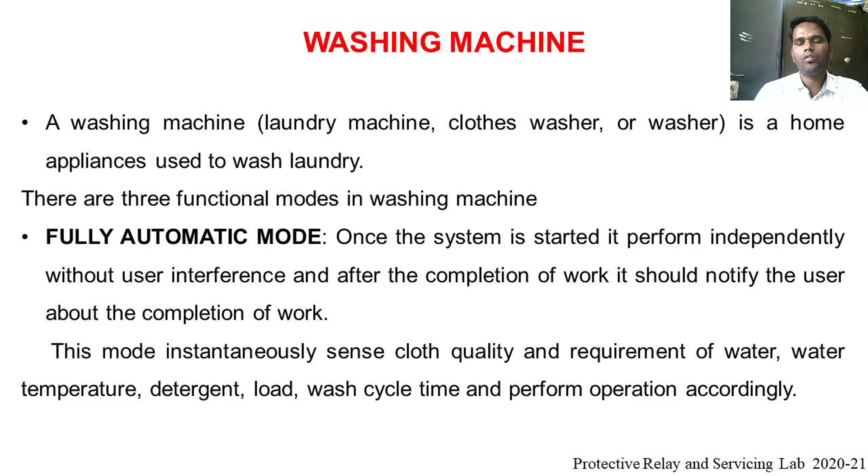This mode instantaneously senses the cloth quality and the requirement of water—water temperature, detergent, load, wash cycle, time—and performs the operation accordingly. It automatically senses how much cloth is inserted, the amount of water required, the water temperature, the amount of detergent needed, the load condition and type, and the wash cycle—pre-wash, wash, rinse and spin—along with the time for each cycle. All these are done automatically by the fully automatic mode.

Next is semi-automatic mode. In this mode, washing conditions are predefined—what is the time for pre-wash, wash, rinse, and spinning. These conditions are predefined; we have to set them in advance. Once the predefined mode is started, the system performs its job, and after completion it informs the user about the completion of work.

Next is manual mode. Here the user has to specify which operation he wants to do and provide related information to the control system—inserting the clothes, adding water, adding detergent, setting the washing time and the spinning time. Everything has to be manually set by the user, which is why it's called manual mode operation.

Next is the semi-automatic washing machine, which is the subject of this experiment. In this semi-automatic mode, the washing conditions are already predefined. Once the predefined mode is started, the system performs its job, and after completion it informs the user about the completion of work.

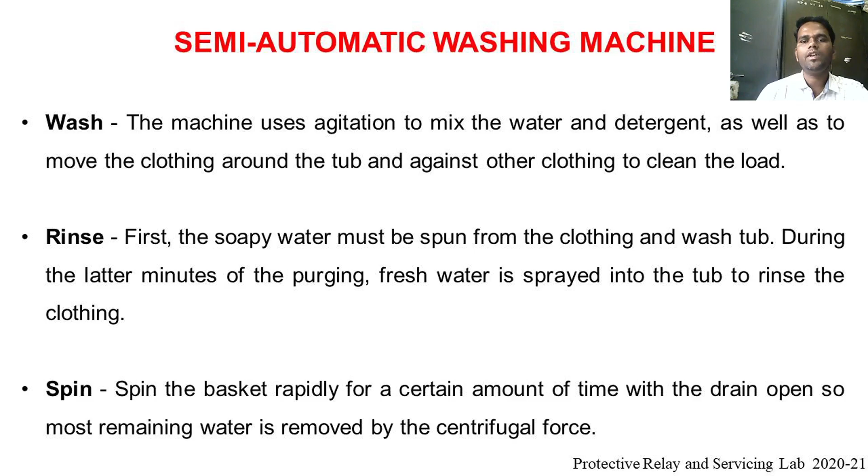Similarly we have the outlet valves. From the outlet valve or drain valve I take the soapy water from the tub. There are two tubs here: one is the inner tub, one is the outer tub. The inner tub houses the agitator. I add the water, add the detergent and place my clothes inside the inner tub, and I have an agitator in the inner tub. The outer tub is the one which holds your inner tub. One more thing is that this agitator is connected to the motors, which are coupled with a conveyor belt and gaskets. One more part is the water pump, which takes the water to the inlet valves.

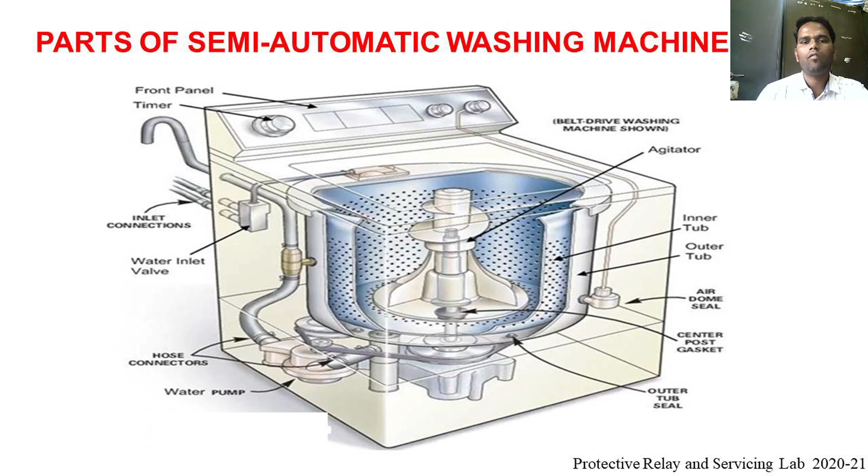So what are the parts of semi-automatic washing machines? The water pump circulates the water through the machine, rotating in two directions, clockwise and anti-clockwise, to remove the dirt from the clothes. That is achieved by the water pump. Next is the water inlet control valve. This is located near the water inlet point to fill the water in the tub. To fill the water in the tub we need a water inlet control valve.

Next is the drum, a very important part. There are two drums inside the washing machine. One is the inner drum, where the clothes are loaded and water and detergent are added, which moves around the washing machine and is perforated with holes to allow the water in and out. And the outer drum houses the inner drum and the water, stopping it from leaking into the rest of the machine, and supports the inner drum. It does not let the water go to different parts of the washing machine. Otherwise, if the water leaks, the associated parts like the motor will get damaged.

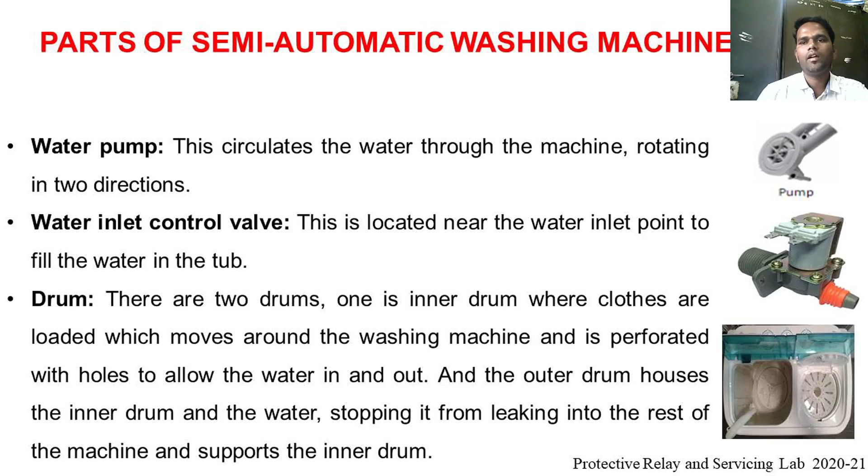So next is the agitator or paddle, a very important part of the washing machine, which is the main part which washes our clothes. It is located inside the tub of the washing machine and helps perform the cleaning of the clothes.

So next is the washing machine motor. This is combined with the agitator or the disc that turns the drum. So a very important part is the washing machine motor, which is going to rotate your washing machine drum. It produces a rotator motion.

The motors used for automatic washing machines earlier were universal motors, and nowadays we use modern electronically controlled single phase AC induction motors for the motoring action.

So the last one is the drain pipe. All the dirty water from your washing is expelled from the machine via the drain pipe. And the next one is the display and control unit. It houses all the control buttons to perform all the washing cycles. From the control display buttons, I am going to perform all the actions by pressing the buttons or regulating the knobs.

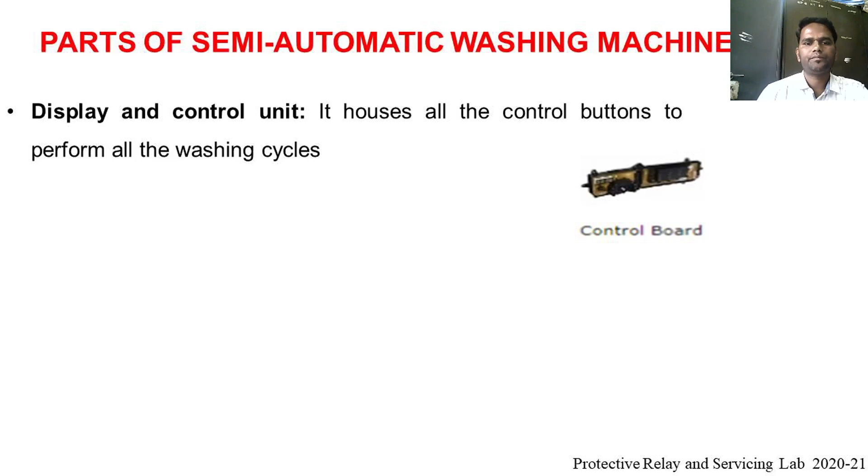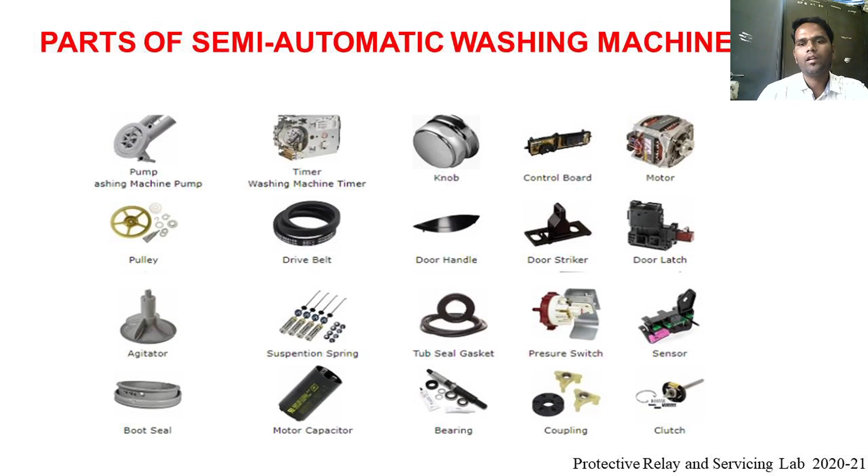And bearings. Wherever there are mechanical rotating parts, we need proper bearings, and couplings are used for coupling my motor with my agitator, and clutches. These are all the different parts of my semi-automatic washing machine.

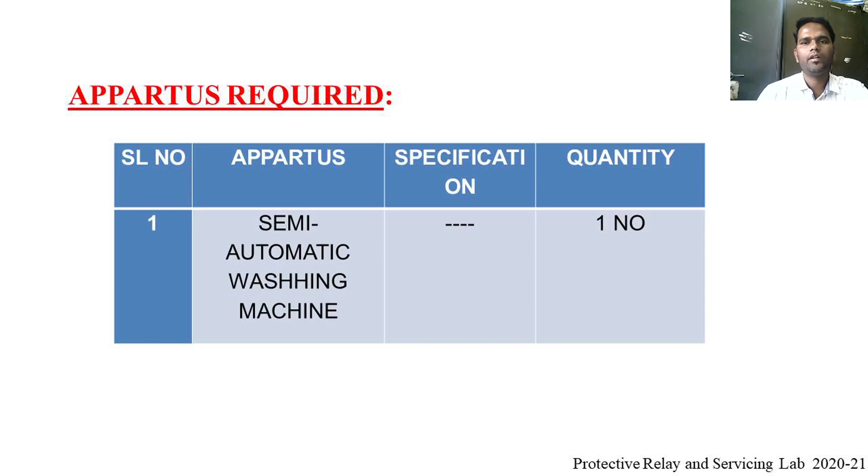So the apparatus required for this experiment is the semi-automatic washing machine. The tools required are a testing lamp, continuity tester, cutting plier, and screwdriver.

So this is the circuit diagram for the semi-automatic washing machine. The input supply comes from the mains, and it goes to two switches, which control the two motors. So I have two motors over here. One is the washing motor, one is the spinning or dryer motor. Both motors are universal motors or single phase induction motors.

For both the motors I am using capacitors. Capacitors are used to give the starting torque to the motor. Once the torque has been generated, the motor will start rotating. Once the motor starts rotating, the capacitor is disconnected.

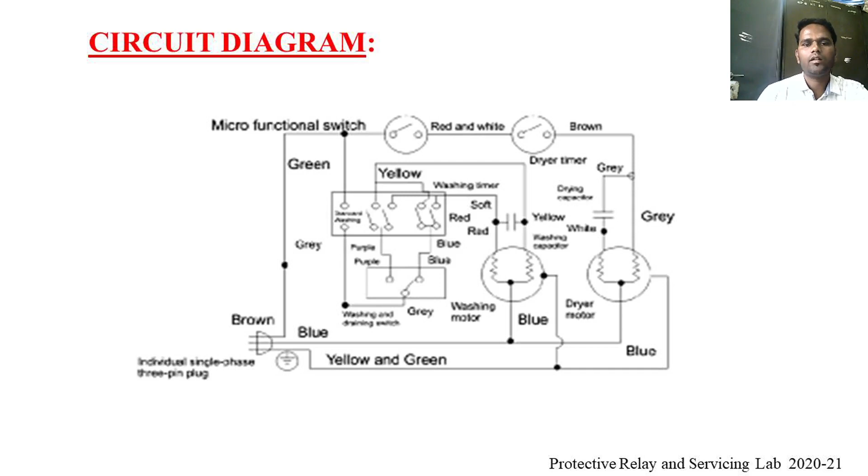So next is what are the faults which are going to be occurring in the semi-automatic washing machines. A few faults have been listed out, and what is the reason for that fault, and how the troubleshooting has been taken place. So next is the power cable failure. The power cable failure may be because of open circuit or short circuit. So for this one I need to check the continuity by the series test lamp and replace that power cable.

When the machine is switched on, the agitator does not turn on or the drum does not rotate. This is because the motor may be damaged, the motor is not properly getting the supply, or there may be no proper connection between the agitator and motor. So if there is damage in the motor, change the motor or check the conveyor belt or check the proper connections of the agitator with the motor.

When the buzzer is on, the buzzer indicates there is an overload condition, meaning you are adding an extra amount of water or extra amount of clothes more than the load prescribed by the manual. So in that condition you have to check the clothes and reduce the load. When the operating switches on the panel board do not work, that can be a problem with PCB board failure. So you have to check the PCB soldering connections and replace the damaged parts.

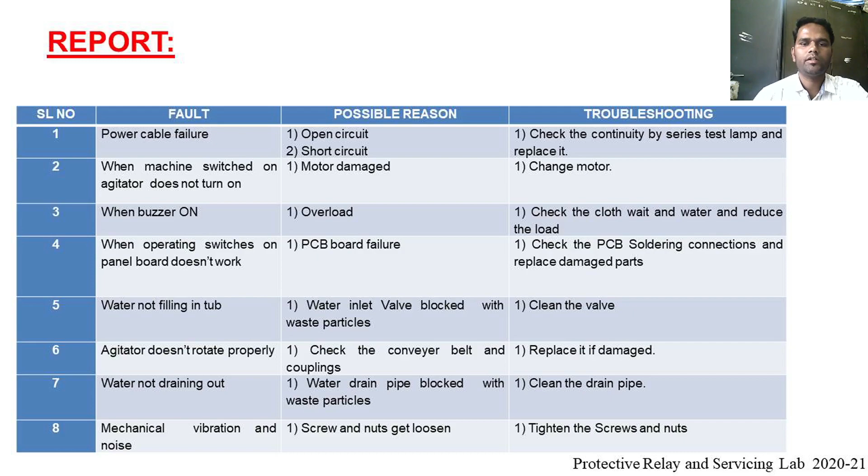So the procedure to identify, dismantle and troubleshoot this semi-automatic washing machine is: dismantle the semi-automatic washing machine, check the power supply cable through the testing lamp. If it is a short circuit or open circuit, replace the power cable. Check the condition of the control panel board components with the multimeter. If it is a soldering problem, then solder it properly. If there is damage, then replace the electronic devices with proper soldering. If the control panel components are not working, then replace them.

Check the washing machine motor condition through the testing lamp. If it is working properly, then check the connections of the motor with the agitator, the couplings and conveyor belt. If the motor fails to work, then replace or repair the motor. Check the associated parts which connect the motor and agitator, like couplings, vibrators, springs and conveyor belts. After taking all these precautionary measures and resolving all the problems, assemble all the parts and run the machine in the desired conditions.

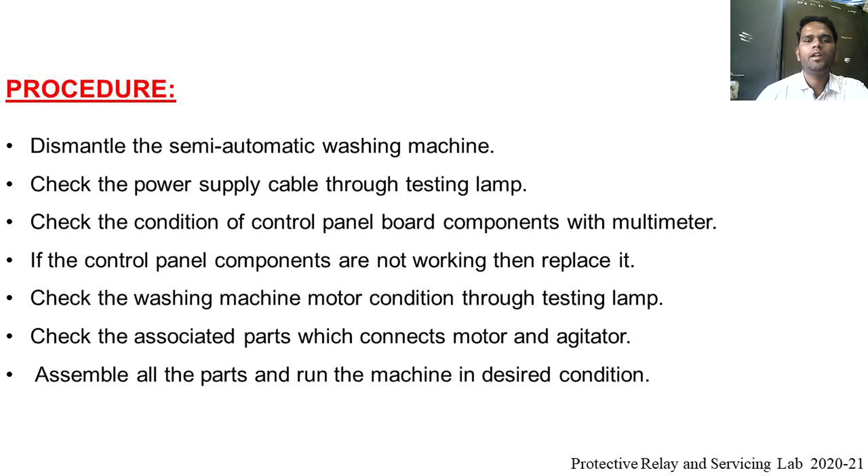So after performing this experiment, the students will be able to understand the working principle of the semi-automatic washing machine. Very importantly, identify the different parts of semi-automatic washing machines like the drain pipe, inlet valve, agitator, motor, springs, gaskets, inner tub and outer tub. They will be able to diagnose faults in the semi-automatic washing machine and suggest suitable remedies to troubleshoot the problem.